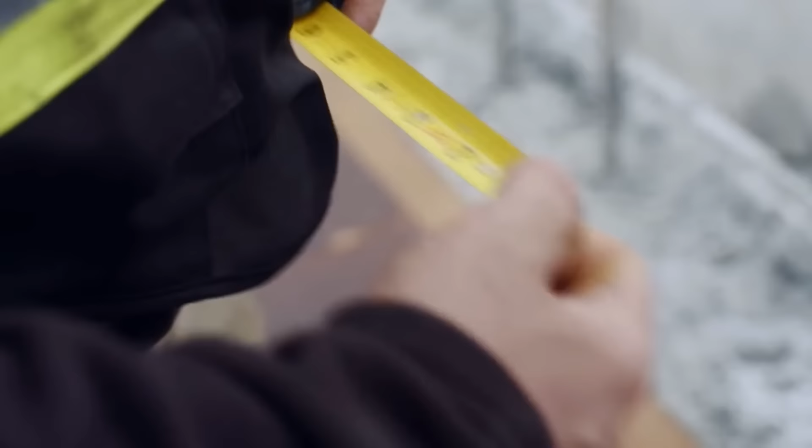It's hard to believe that through the entirety of this project, from the seed of an idea to a fully constructible model, our project stakeholders have never met in person or visited the site. That is, until now.

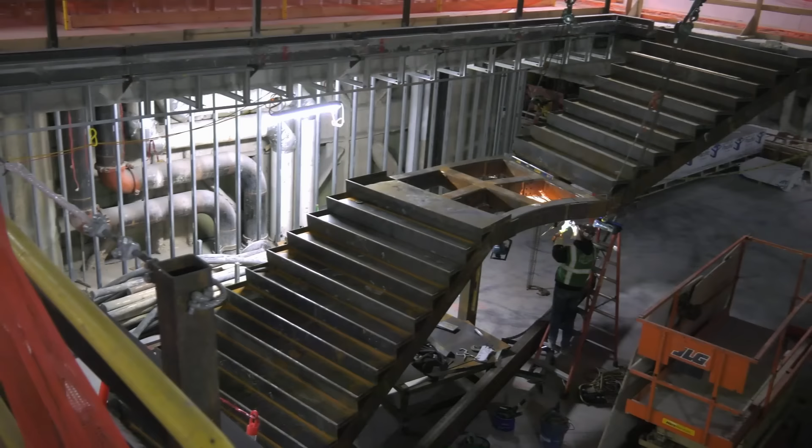In this episode, we'll conduct all the final checks that take place on site before a project like this moves into the physical build. We'll mix digital and physical, overlaying and exploring our digital twin and all the detail within it, in the space where it will ultimately be committed to glass, steel, and concrete. We'll look back at all the processes that enabled us to get here, and look forward to how connected construction will continue to lead the project through to the handing over of the keys.

It wasn't just our architects and engineers meeting in person for the first time. The project owner, Matt, was the next arrival, closely followed by Adil, our field technology expert. We've all shared work, but we've never been in the same place and never been on the site.

How does the XR10 work, and how does it help us here? Well, this is an XR10, an approved helmet equipped with HoloLens 2. The huge benefit is it uses holographic technology to merge digital content with your surroundings, or to display digital data, so we have an immersive experience.

It allows us to take all the detail of the model that we've got and put it into the real world, so we can actually walk around it at one-to-one scale. We can interact with all the different pieces.

Exactly. The XR10 allows you to streamline workflows, eliminate errors, increase transparency, and radically reduce project delay. It also allows remote collaboration capability, letting the user stream live to off-site stakeholders. It's a huge benefit for remote collaboration, for example.

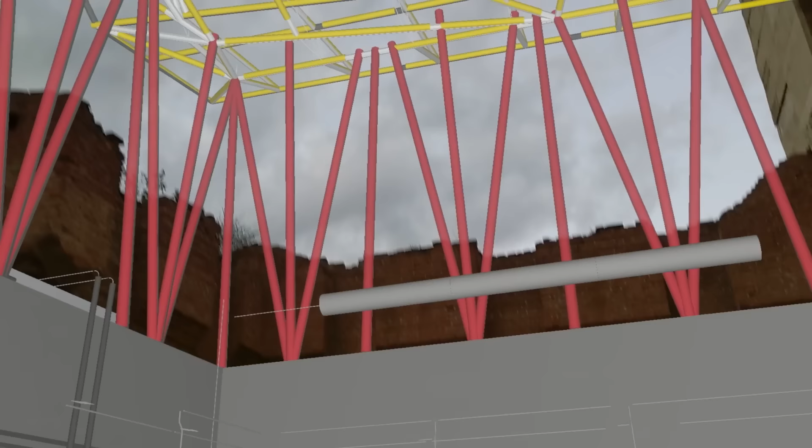We can see the roof, the canopy over the top. There's the ductwork, the electrical. We can see the lights coming up from the bottom, and we can see exactly where they'll be in real space. So I can get a feeling being in here of the new structure as it would be before it's constructed.

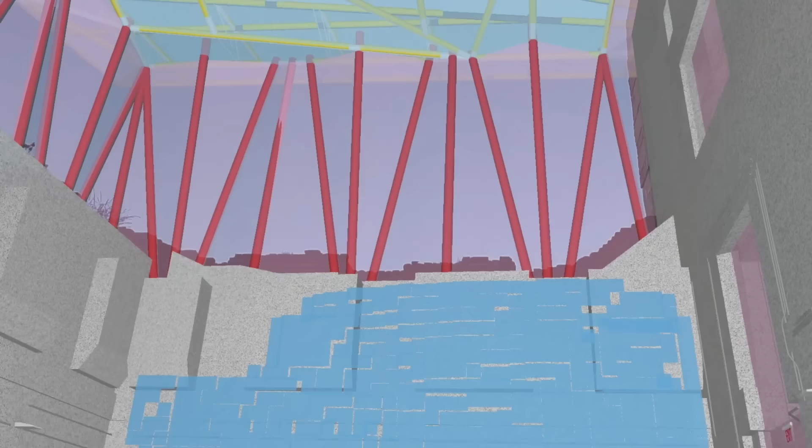Typically before a building's constructed, you don't have the opportunity to stand in the space where you're going to be post-construction and see what it looks like. You rely on 2D drawings. But using this, you can actually see everything as it will be before the construction happens.

You can check for issues, you can check for any clashes. Are there points where steel clashes, or where duct clashes with any of the mechanical? It's a pretty unique experience.

Whether you're dealing with complex MEP like our Pixel Wall, or huge steel staircases that need to be prefabricated and installed, the peace of mind this technology brings is invaluable for any installation. The US Bank Center in Seattle is a great example of how nothing is left to chance.

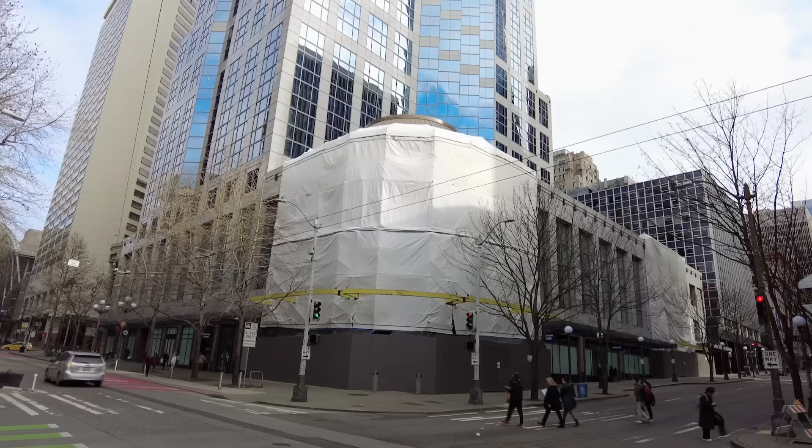It's an interesting structural steel project. It was built overseas, and none of the shapes are US standard shapes. They're all built-up, fabricated members, built in the 80s, and look like it was built in the 80s. They're retrofitting the first 3 floors to modernize it and bring it up as a retail space.

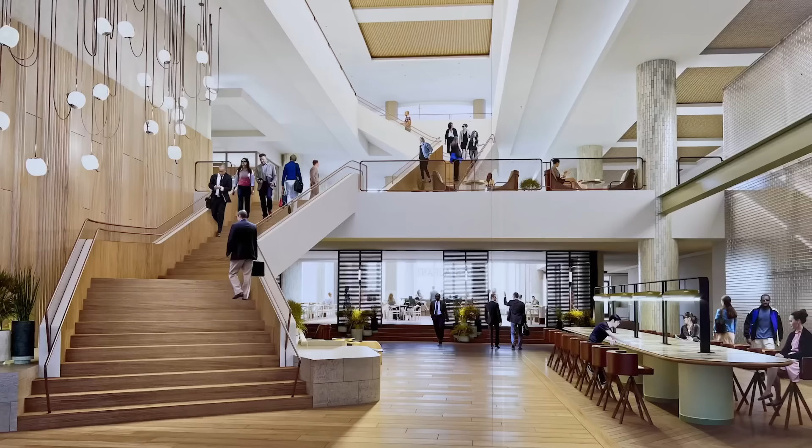One of a kind. Nothing like you've ever seen before. You can look through the entire block, so you can stand on 5th Avenue and look at 6th Avenue by looking through the building. Then you'll have grand stairs that you're looking at, two of them, that come together. Those grand stairs you can see from the street as you look inside the building.

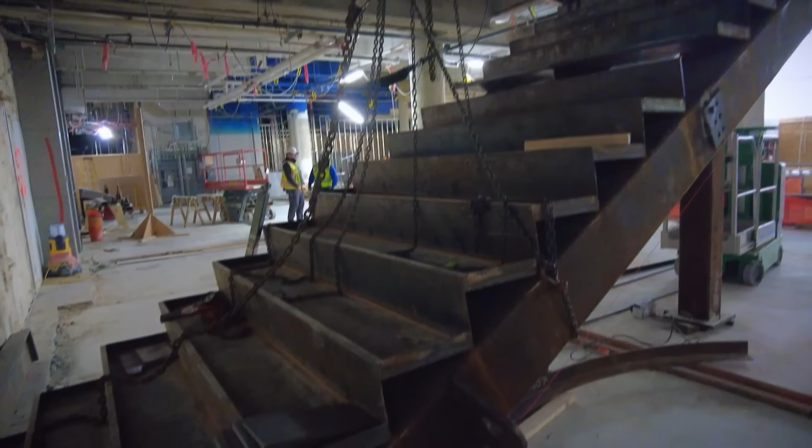I mean, the space is going to just blow your mind. The scanning technology allows us to fabricate stuff way more accurately than we would have. These stairs were in 3 pieces. In the past, you might have stick-built them because you weren't sure they'd fit. Putting this stuff together like it's a brand new building on a retrofit job—that's significant.

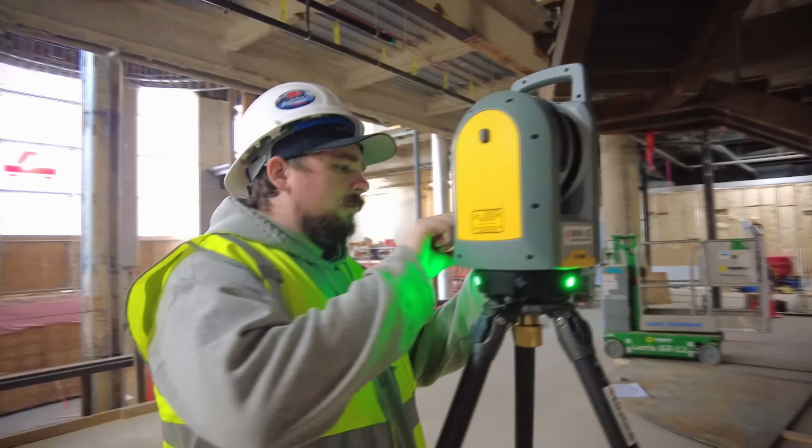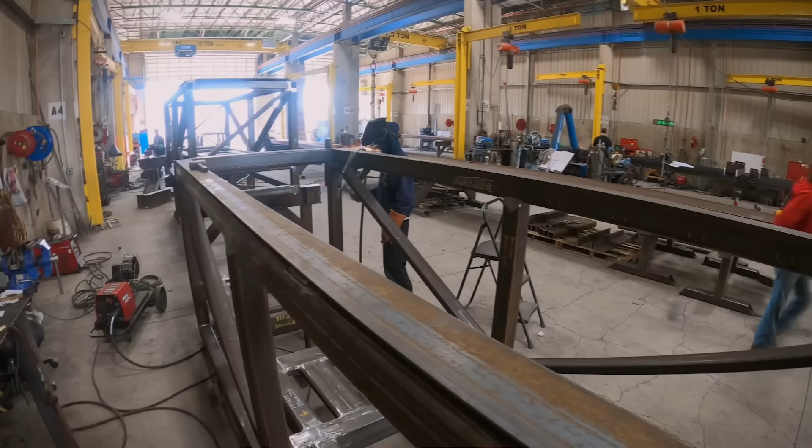The scanner allowed us to go in and actually measure what's here, so we could make our steel fit. We showed them what we could do with the scanner technology - that we had the capability, the know-how from our field team to scan, through our detailing department to interpret those scans and get them to work, all the way through the fab shop to make sure the quality of the steel we're providing is good, and the logistics to work with the site to get it brought out.

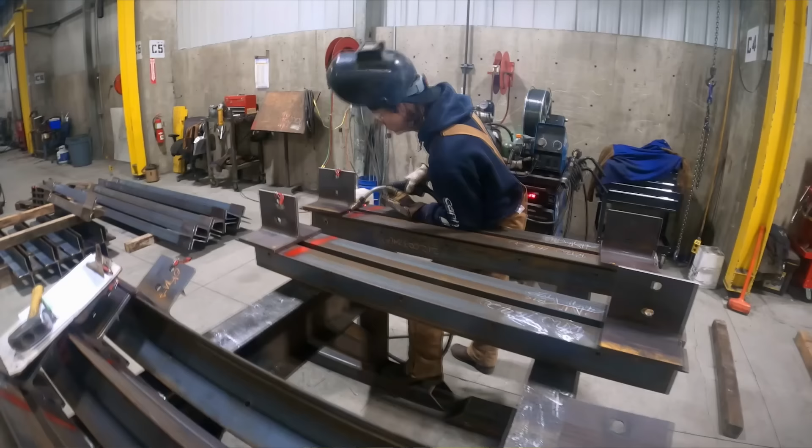The quality of our people is significant, and then once it gets to the shop, the fabrication, the welding, the quality control processes are also significant.

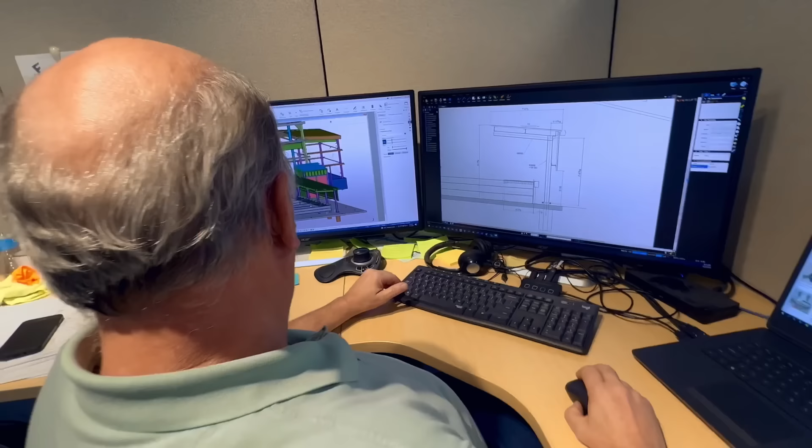So you have the point cloud of existing field conditions, and you have the new model - you model it in, and we build our drawings off of that new model. The shop people build off of those drawings. But then, once it was complete, we actually scanned the new steel of these stairs in the shop, and we were able to put the new steel point cloud into the old steel point cloud to make sure it fit, and made sure the shop guys built it per our model.

So when I say I can guarantee it's going to fit, I have backing behind that in the fact that we scanned this new steel and virtually put it together before it was here.

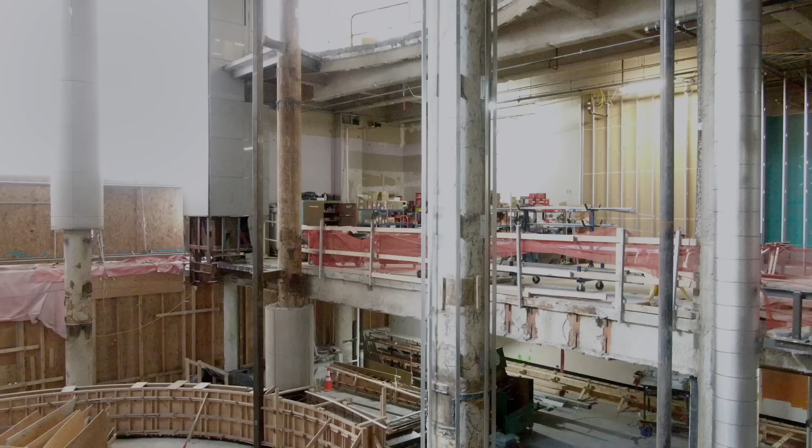It saves significant time and money, which time is money. I mean, you do the math - if you save 4 days, 12 guys each day, that's thousands and thousands of dollars. So a significant amount of money, and a significant amount of stress saved as well.

This is the point in the project where all of our digital and virtual design and planning is handed over to the team managing the physical build.

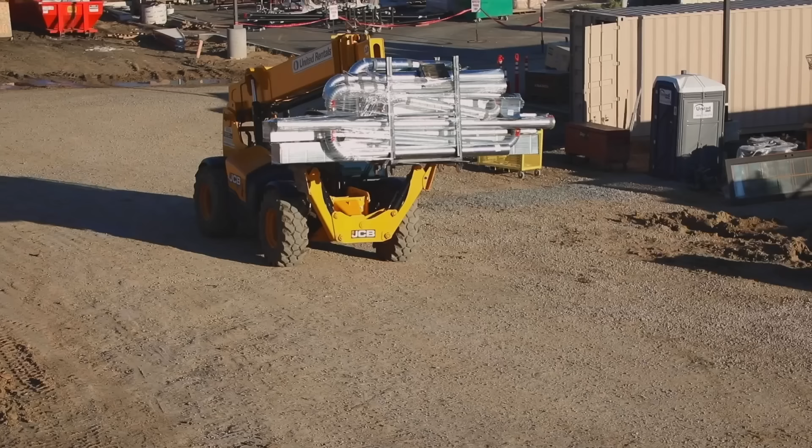I'm sure it's not a huge surprise, having chosen a UNESCO World Heritage Site as the heart of our project, that this is where our story has to end, or at least the development of a physical Great Library on this beautiful, ancient site.

As the sun set over the Great Library, the team took the opportunity to raise a glass and reflect on the successes of the project and how it can continue to benefit the industry for years to come.

How does it feel to be here on the completion of the project? It's fantastic being able to add a structure like we did in the way that we did. It feels great, and I think we've proven that working in the way we planned really adds value to a project. We have one single source of truth in that BIM model - there's not much room for misunderstanding. So I'm very happy with the way we did it.

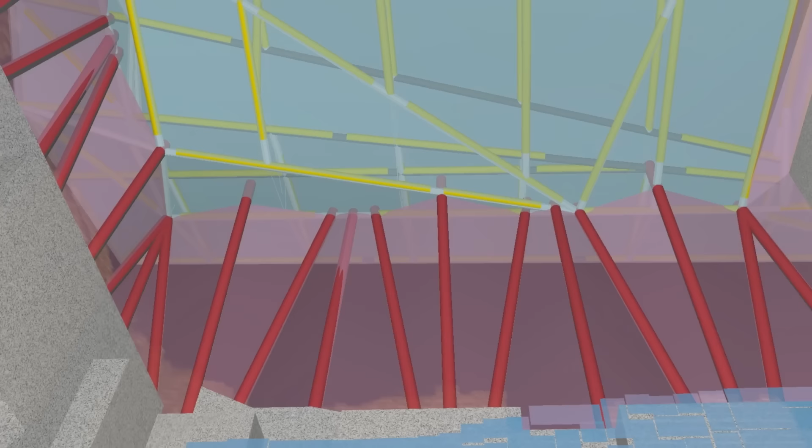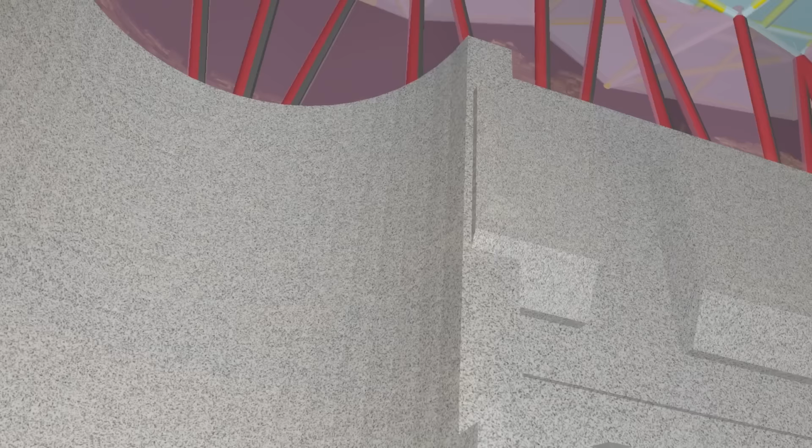This has been such a pleasurable experience, sharing the knowledge among all the people through files and conversations, relying on conversations of expertise, but then seeing it resolve in a real site. I hope we can use this to show the conventional aspects of how we do things. It shows how we can all work together to create these things that we then can visualize through the technology on site. This is the way we hope all projects will go in the future.

Seeing what people can collaborate and make - something that could actually be built down to the bolts, all of the air handling, all of the electrical work, everything done. Different parts of the world, different times, different locations, all from the same information. It is unbelievable.

BIM model looks the same anywhere in the world. Yes, absolutely.

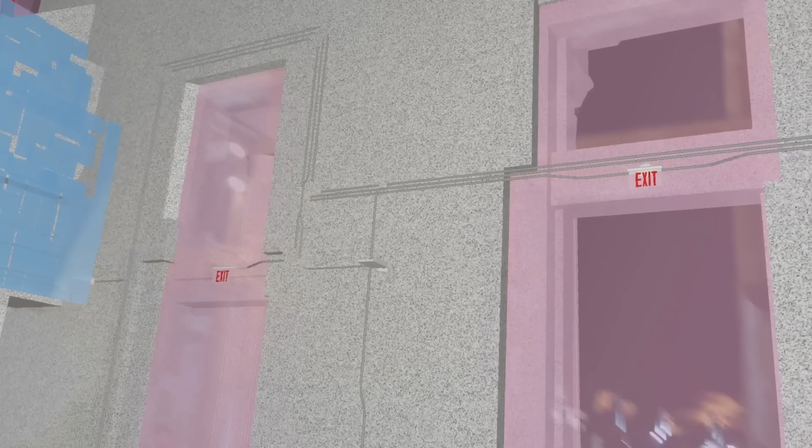It's a universal language. It's simple for me to read and understand, and anybody that we've given it to is able to digest the intention in the design, and then for us to see all the engineering work and those forms, and for that to then go into a detailing process where we can understand the cost.

We showed the 3D models to some of the tourists walking around here today. The enthusiasm in their faces when they saw what we were trying to show them was amazing - they immediately understood what we were planning to do.

Well, thank you so much, every single one of you. You've done such incredible work.